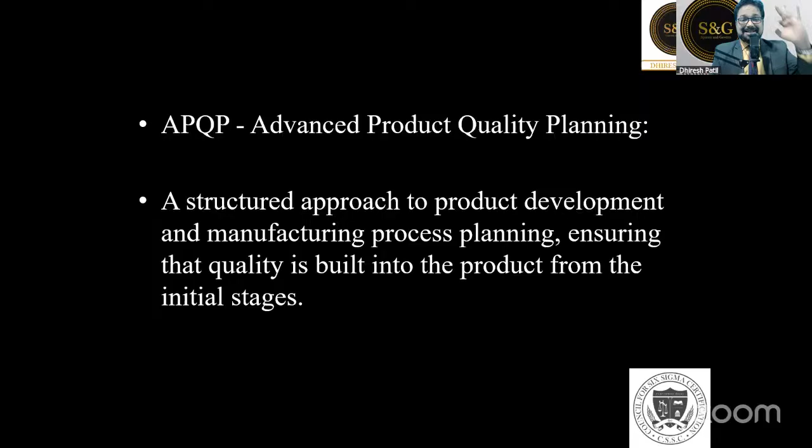Because most of the times, whenever we observe quality challenges, those are basically ingrained in the DNA or the design of the product itself, or the process which converts the raw material into finished goods. So either the design of the product or the process which makes that product; the root causes of those quality challenges lie in that. That's why advanced product quality planning ensures the quality of the product right from the initial stages itself.

Then comes failure mode and effect analysis, a systematic method of identifying and assessing potential failure modes and their impact on product performance, safety, and reliability. This is what we are going to go deeper into in today's session. So FMEA is: in this process, what are the various risks associated? Failure mode meaning the way in which the product can fail. Those various types of failure modes we can identify and take action about. We can assess the effect as well. We give specific rankings for severity, occurrence, and detection.

So FMEA is basically a risk analysis tool which analyzes the risk in the process and product, so that we analyze it beforehand and take measures to counter that. Then comes measurement system analysis, as I mentioned, GRR, gauge R&R, and AAA. For the very new people, when you go through the green belt curriculum, in the measure phase itself you will find measurement system analysis, gauge R&R, and AAA.

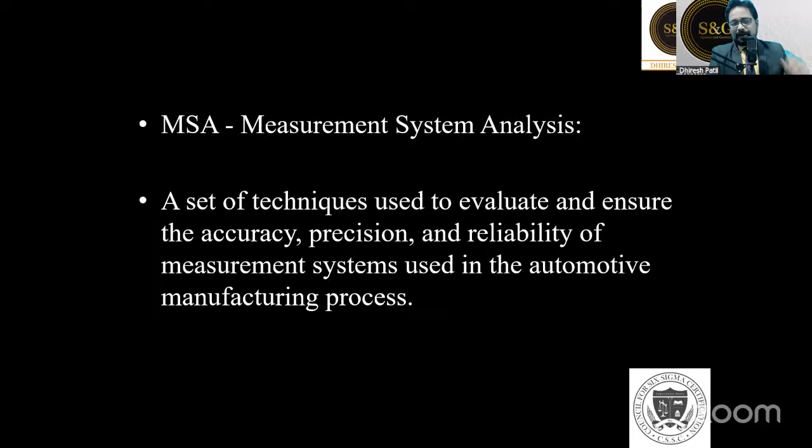So basically, measurement system analysis is a technique to evaluate and ensure the accuracy, precision, and reliability of the measurement system. In short, there is some variation induced by the measurement system, and to measure that variation we have the techniques of GRR and AAA. It started in the automotive sector, but it is also used in manufacturing and the service sector.

Then comes statistical process control. As I mentioned, quality control, the control charts, etc. The methodology involves monitoring and controlling processes through statistical techniques, ensuring they operate within the control limits. If you remember the control chart, upper and lower control limits, if the process flows within the control limits, that is a stable process. So statistical process control ensures that the process remains stable and within control.

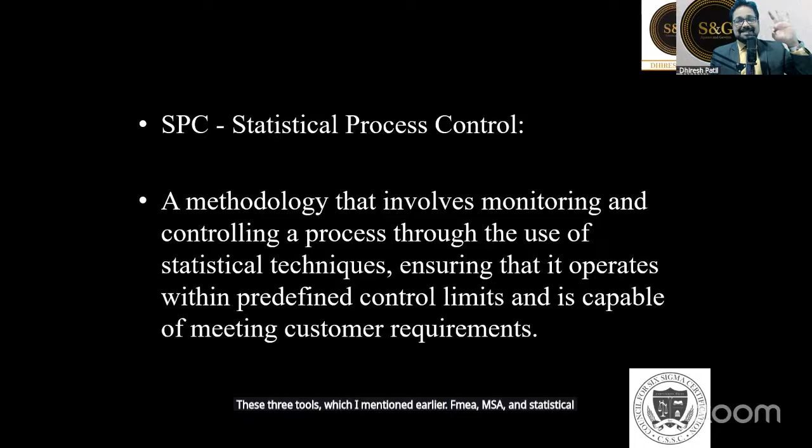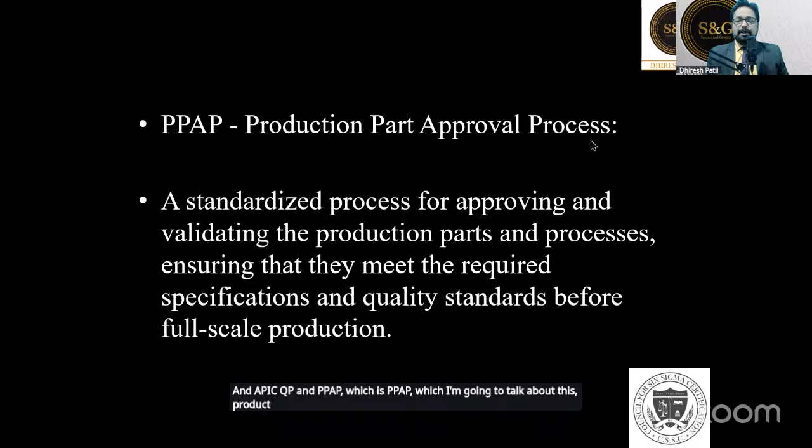So this is how SPC basically phases out. So see, these three tools which I mentioned earlier, FMEA, MSA, and statistical process control, are already there in the green belt and the black belt levels. And APQP and PPAP, production part approval process, which I'm going to talk about, are briefly covered in the master black belt curriculum.

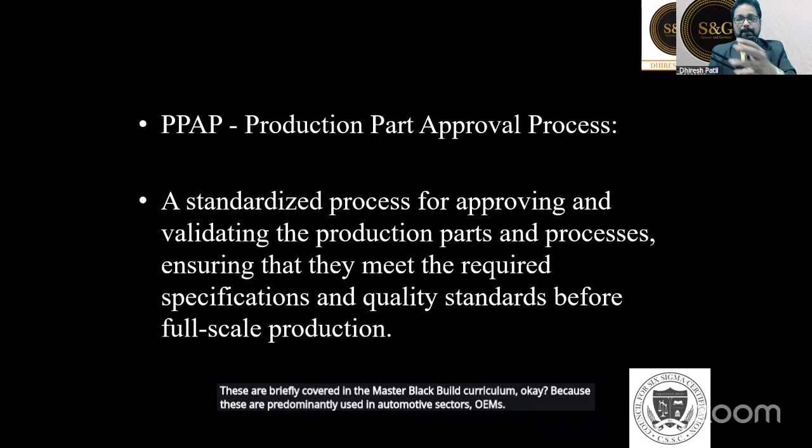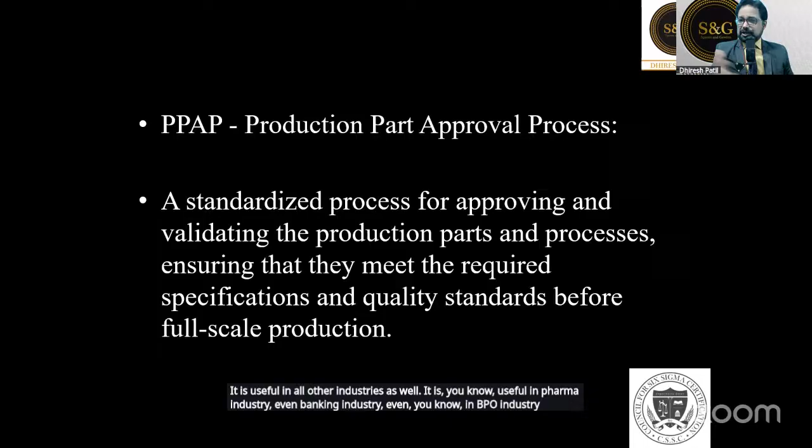Because these are predominantly used in automotive sectors, OEMs, original equipment manufacturers, and their tier 1, tier 2 suppliers. But even though it originated and is very strongly practiced in the automotive sector, it is still useful in all other industries as well. It is useful in the pharma industry, banking industry, even BPO, manufacturing, any industry you can take. These processes are very, very powerful.

So the last one is PPAP, which is production part approval process. It's a standardized process of approving and validating the production parts and processes, ensuring that they meet the required specification. So it's like you take a small scale pilot run, and then you make sure that all the parts and all the processes were followed properly, all the settings were done properly, and the product is matching the specification set by the customer. Once that is approved, then only you can go for full scale production. So this is called PPAP.

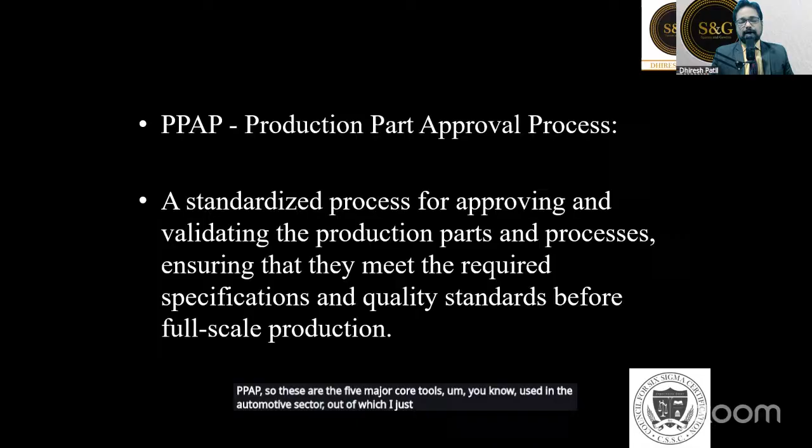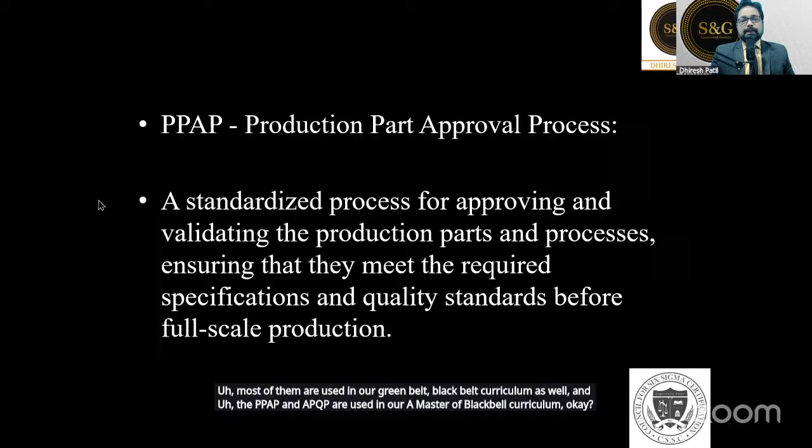So these are the 5 major core tools used in the automotive sector, which I just bifurcated. Most of them are used in our green belt, black belt curriculum as well, and PPAP and APQP are used in our master black belt curriculum. Now let's talk about FMEA. FMEA is, as I mentioned to you, failure modes and effects analysis.

This originated in the 1940s in the US military, specifically in the aerospace and defense industry. After that, it was further refined and expanded in the 50s and 60s, and they started using it in NASA and the automotive industry. Now understand this, NASA and the automotive industry are industries where precision is very important. Accuracy and precision are very critical, because if anything happens to NASA satellites or a rocket or whatever project, it runs into billions.

Even in the automotive industry, if anything goes wrong, it directly impacts the life of the people traveling in that automobile, as well as the people on the road. Everybody will be at risk. So in these two areas, it is very important to identify the risk well before and take corrective measures. Then in the 70s, FMEA gained broader recognition as a risk assessment and prevention tool in various industries. The 70s was the era where it spread across industry, and the industry started liking this.

And then the Automotive Industry Action Group, AIAG, if you remember this. This body got established in 1982, and they published the first manual of FMEA, the AIAG FMEA manual, which became a reference guidance manual for all these things. And then it got revived again.

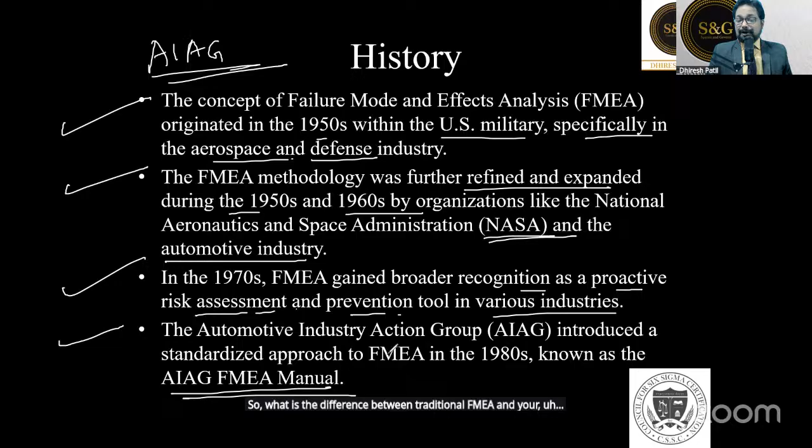But recently, see, the American automotive industry and the German automotive industry are different. In today's session, what I'm talking about is traditional FMEA. So what is the difference between traditional FMEA and modern FMEA? Let me touch upon it and give a quick bifurcation. There is one part which is US based companies, and that body is called AIAG, Automotive Industry Action Group.

The second body is a Germany based body. So US based is AIAG, and the German based is VDA. VDA is a German term, Verband der Automobilindustrie. You need not remember this, but just for your information, it is the full form of VDA, and Automotive Industry Action Group is the full form of AIAG. So these are the two bodies basically.

Now, AIAG is a relatively new body. The German body is a very old body, established in 1901 or 1902. Now if you see the big US brands which are members of AIAG, it is General Motors, Ford, all the US brands. Can you just name a few US brands for me? You have Chrysler, and you have what? Chevrolet, right?

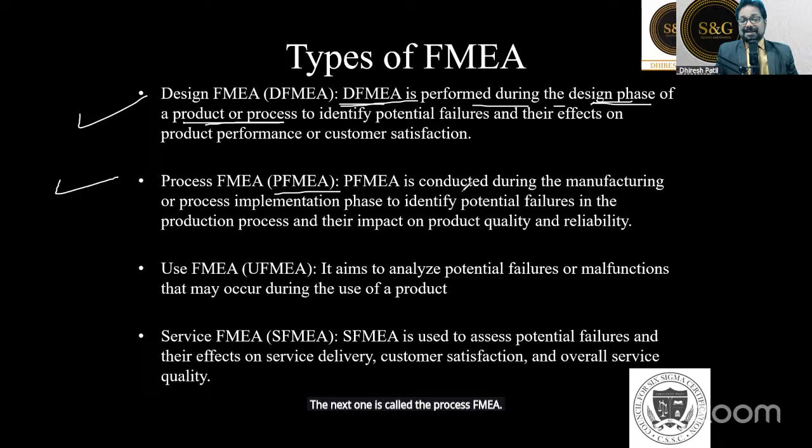So if you see, there are 4 types of FMEA. One is called design FMEA. Design FMEA, the name itself suggests, is performed during the design phase of the product or the process. In the design phase itself, what can go wrong? What are the risks associated with it? That is called design FMEA. The next one is called process FMEA. Process FMEA is conducted during the manufacturing process and implementation phase, while you are producing that part. So during production, what can go wrong? That is called process FMEA, PFMEA.

And in Lean Six Sigma, we majorly focus on PFMEA. Okay. But of course, we cover DFMEA and the other parts of FMEA as well. Then there is something called UFMEA. It aims to analyze the potential failures and malfunctioning during usage. Now understand this, okay? If you want to design a laptop, in the design stage itself you find out the risks associated with the design, the product, the processes. That is called design FMEA, during the design phase.

Then you start making the product, okay? In the manufacturing process, whatever risks are associated, if you start to capture those risks, that is called process FMEA. First is design, second is process. Now the product is ready. Now the customer has started using the laptop. Let's say, for example, I'm using the laptop. So during the usage, what can go wrong? That is called UFMEA or use FMEA. During the use of the product, whatever risk is associated, that is called UFMEA.

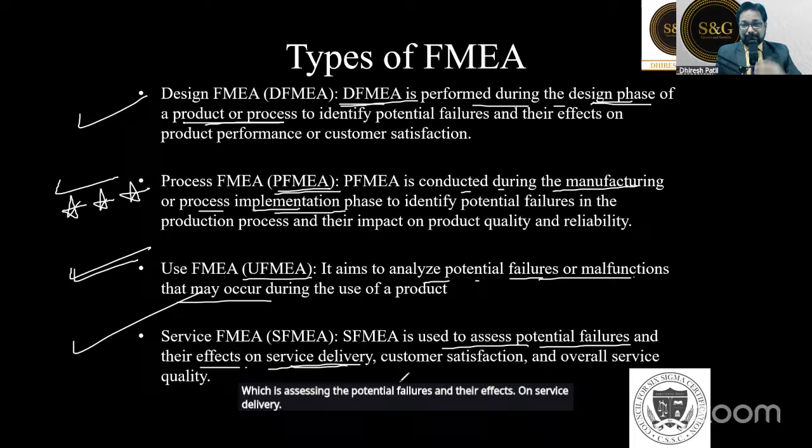And there is the final one, which is called SFMEA, service FMEA, which is assessing the potential failures and their effects on service delivery. Okay, if you are providing a service, not a product. For example, let's say training. Training is a service, right? So in training, what kinds of failures can happen while delivering that service? Consultation is a service. So while delivering the consultation service, what kinds of

Somebody got unmuted. Make sure that you're muted all the time.

Now, service FMEA: if you're delivering a service, what can go wrong during the service? What can impact the customer satisfaction and overall service quality? Those potential failures are captured in service FMEA. Majorly our focus relies on the process FMEA, because as we all say, Lean Six Sigma is applicable wherever there is a process in place. So we identify process failure modes and process risk by using process FMEA.

Are you clear with this? Anyway, I'm going to give this entire presentation to you. Are you clear? Just give me yes in the chat box.

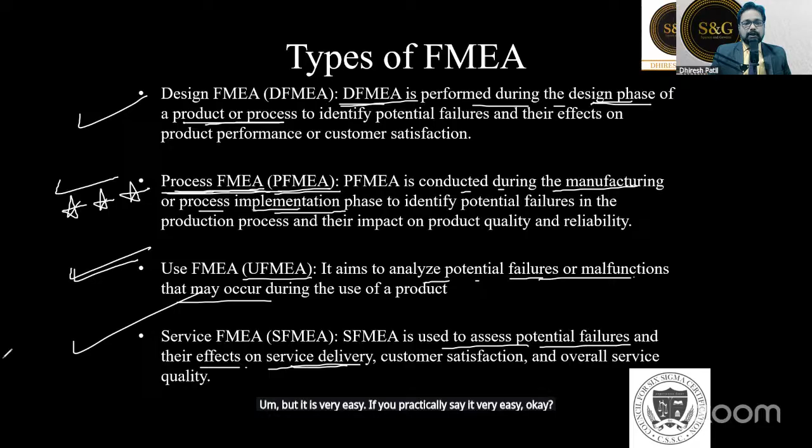Four types of FMEAs, and we are going to focus upon process FMEA the most. I'll give you a couple of examples so that you can easily understand it. Initially, it might look a little tricky to understand the nomenclature, but if you practically see it, it's very easy. Now, let's break down this failure mode, effect, and analysis, and the associated vocabulary.

The first word here is failure. What is failure? Failure means simply a component or a system not meeting the functional intent. For example, the lighting system does not provide the intended illumination. Why do we put the light? Because we want the intended illumination, that much brightness. If that brightness is not there, then it is a failure. Sometimes it will not even start. That is also failure. So whatever is the intention of that product or service, if that is not fulfilled, that is called failure.

Are you clear with this? Just type yes in the chat box. This is very, very important. Are you clear? Just type yes in the chat box.

Failure is if your product fails to meet the specification requirement or intent of use. Very simple explanation, simple example. Let's go ahead and understand the failure mode. Failure is failure to meet the intention. What is failure mode then? Failure mode is the manner in which the component or the system fails.

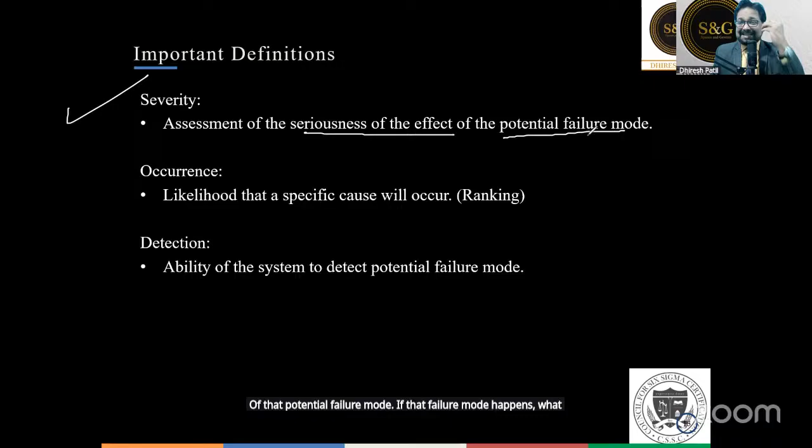So what is severity? Severity is nothing but the seriousness of impact. If that failure mode happens, what will be the seriousness of its effect on the customer? That is called severity, and we have to give the ranking on the scale of 1 to 10.

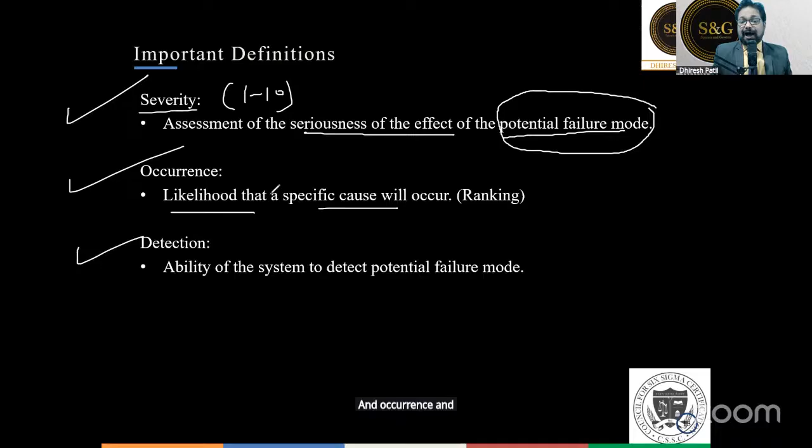Then occurrence: how likely that specific cause will happen. I'll show you a table that will give you more clarity. Severity rating is given to the failure mode, and occurrence and detection are given to the causes. Understand this? Occurrence is how frequently it is happening. And detection: if that cause actually impacts, how are we equipped to capture that impact? That is called detection.

So occurrence means how likely it will happen, the frequency. If it is happening very frequently, every day 10 times, 100 times, on the scale of 1 to 10 that is 9 or 10. But we are not giving the number of times. If it happens 50 times every day, I will give the ranking 8, 9 or 10 because it is very frequent. But if it is happening once in 6 months, I will give ranking 1, 2 or 3.

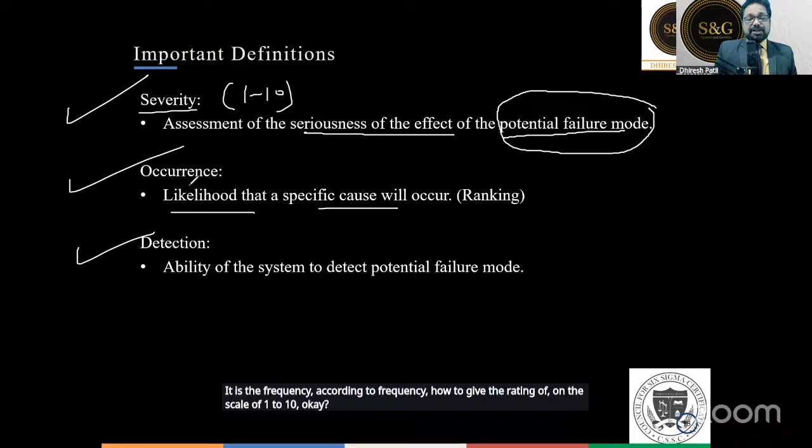How that ranking is given, there is a standard in the manual, and I'll show you that standard as well. So occurrence means how frequently it is occurring. It is not the number of occurrences; it is a ranking on the scale of 1 to 10. A lot of people see it happened 5 times, so they give 5. No, according to frequency you have to give the rating on the scale of 1 to 10. And then detection. Detection means, for example, imagine there is no AIAG ranking table.

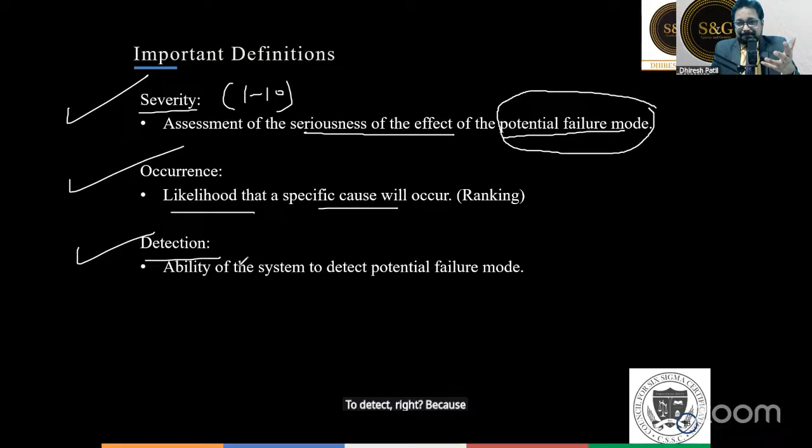Okay. Now, imagine detection, meaning there is some production going on, but there is no quality check. So there is no detection system. It directly goes to the customer. So there is no detection system at all. Wherever the detection is not there, the defect is very difficult to detect, right? Because there is no checking happening. So it is very difficult to detect, so I will rank it as 10.

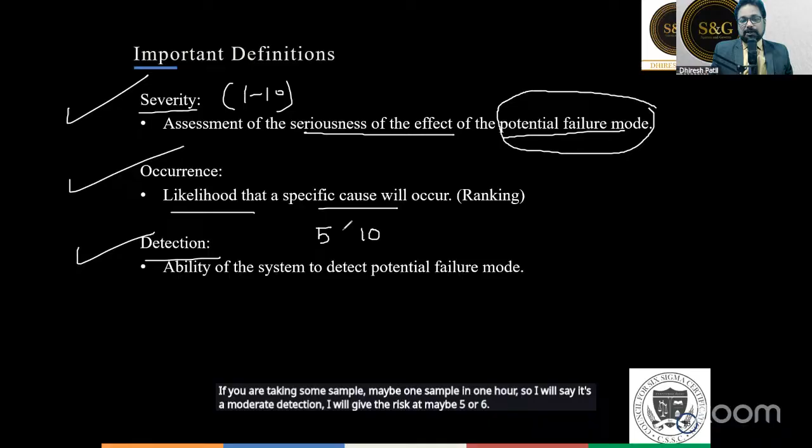If you are taking some sample, maybe one sample in 1 hour, I will say it's a moderate detection. I will give the risk maybe 5 or 6. But if you have a very strong detection system, every product is checked very thoroughly, completely, so the detection risk is very, very low. So I will give even 1 or 2.

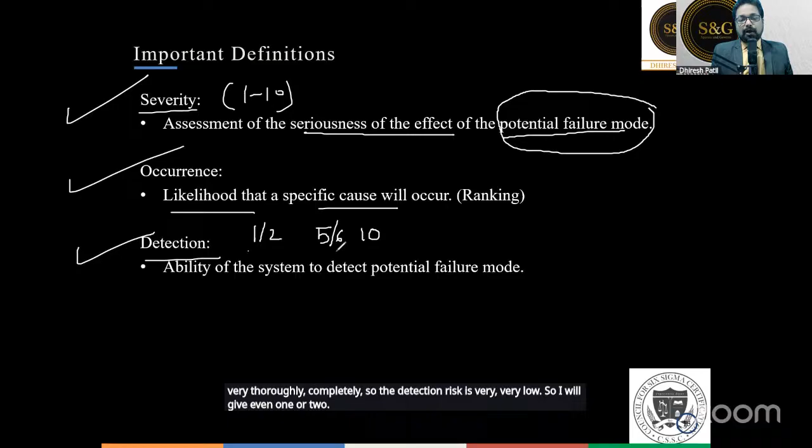Are you understanding? So detection meaning what? If your system is very strong in detection, your risk is reducing. Strong detection system, low risk, so I will give 1 or 2. Moderate detection system, moderate risk, I will give 5 or 6. Very limited or no detection system, the risk is very high, so I will give the difficulty of detection as 10.

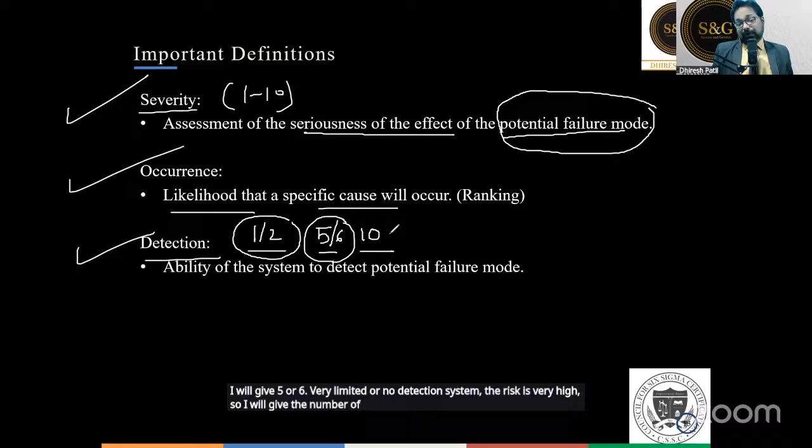Are you clear? Yes, current control. Exactly. The detection is the current control. What current control mechanism we have? Let's say in my society there is no watchman, no CCTV camera. What will be the ranking for the risk right now? Type in the chat box. What will be the risk on the scale of 1 to 10? Yes, 9 to 10. Are you clear?

Very simple. And if we have very high-tech security cameras and 2 watchmen at every door with guns, etc., the detection of any security threat is very, very good. So the risk is very low, and on the scale of 1 to 10 I'll give 1, because the risk of somebody intruding is very low since we have a very strong security system established. Exactly how equipped the system is. So these are the rankings we give in the FMEA table. I'll show you a couple of practical cases so that you will understand this.

So once we give the ranking like this, then we identify the risk priority number, which is called RPN, which is the multiplication of severity number, occurrence number, and detection number. Severity, occurrence, and detection, we multiply this, that becomes RPN. That defines how much risk is associated with that failure mode and the cause, and what is our priority. Are you clear?

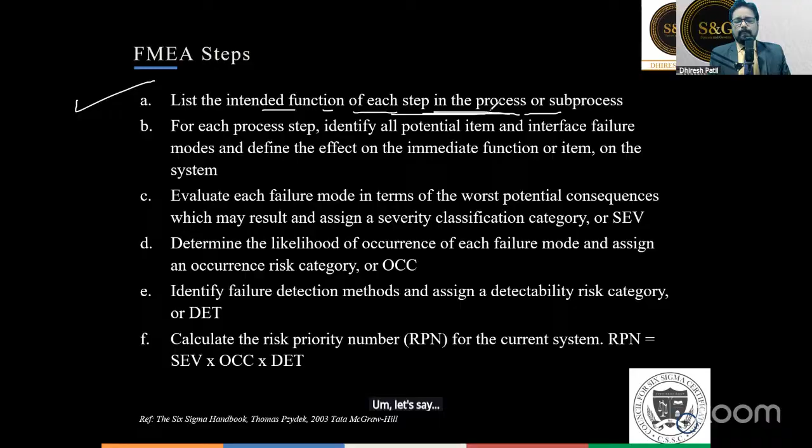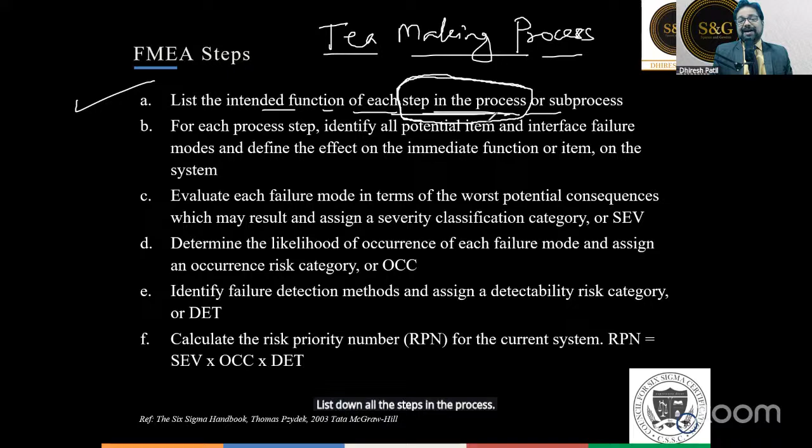So what are the steps to conduct FMEA? First of all, list the intended function and steps of the process. Let's say there is a tea making process. The first step is list down all the steps in the process. In define phase, we have one tool where all the steps are properly mapped. What is the name of the tool? Can you just type in the chat box?

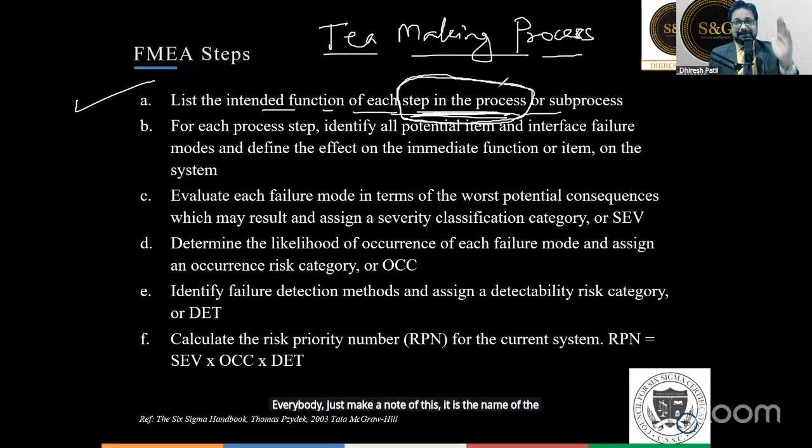Flowchart, close, but it's not flowchart. CTQ tree, no. Yes, it's SIPOC: supplier, input, process, output, and customer. In that, P stands for process, where we have all the process steps listed. Everybody just make a note of this. The center column is called process, so we have all the processes listed there. That's the first step.

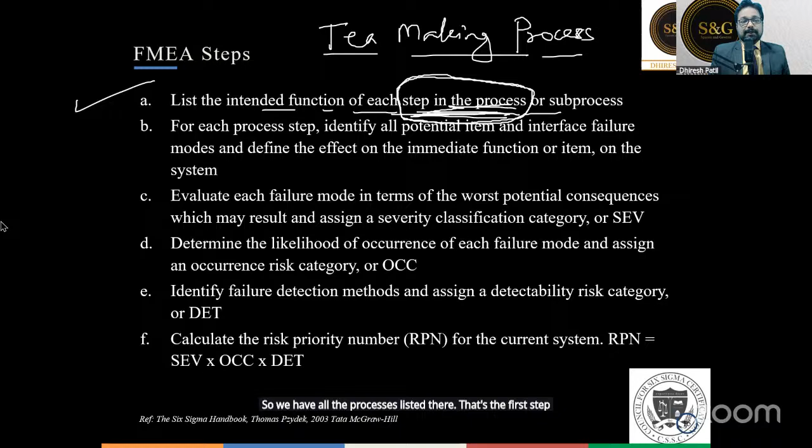Then the second step is, for each and every step, identify all the potential item and interface failure modes. For example, the first step of making a cup of tea is boil the water. Now, in boiling the water, what are the potential failure modes? How can boiling the water fail? For example, let's say you don't have the gas that day.

So, or the gas is there, but the intensity of the gas is very low, a very low flame. So it is not boiling properly. Or you don't have the lighter basically to start, which can delay the boiling process. All right. Or maybe the water which is used may not be proper, there might be some more ppm, so it might impact the boiling. I'm just guessing some more. So the way in which that process will fail, that is called failure mode.

So in process step number 1, let's say I want to walk across the road. What are the ways in which I can fail to reach the other end? I can trip, I can fall down, I can slip because of a banana peel, I can slip because of an oil spillage on the road. There are multiple ways in which I can fail to reach the destination. So these are various failure modes. Similarly, first you list down the steps, then what are the failure modes in that?

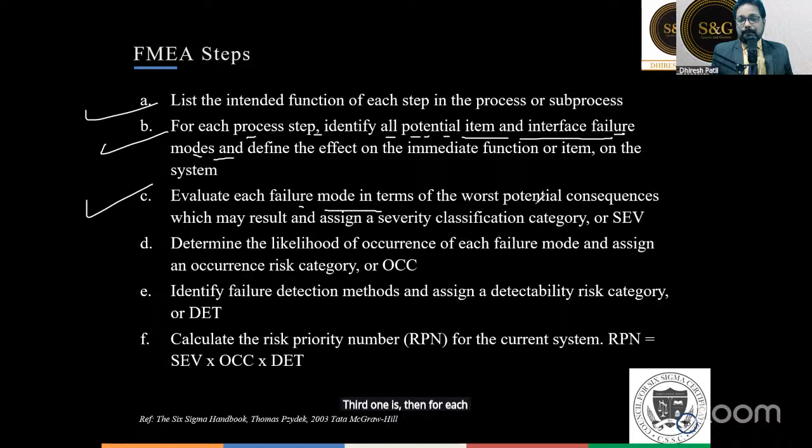Third one is, for each failure mode, what are the potential consequences? That is called severity. Identify what is the effect, what is the consequence which will impact. For example, while walking, if I slip on the banana peel, I can fall back on my head. So what worst potential consequences can happen? You can give that impact, and give the ranking of the severity on the scale of 1 to 10.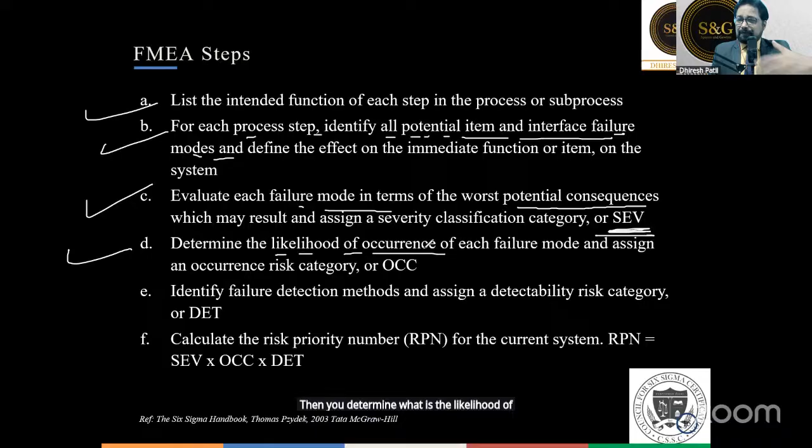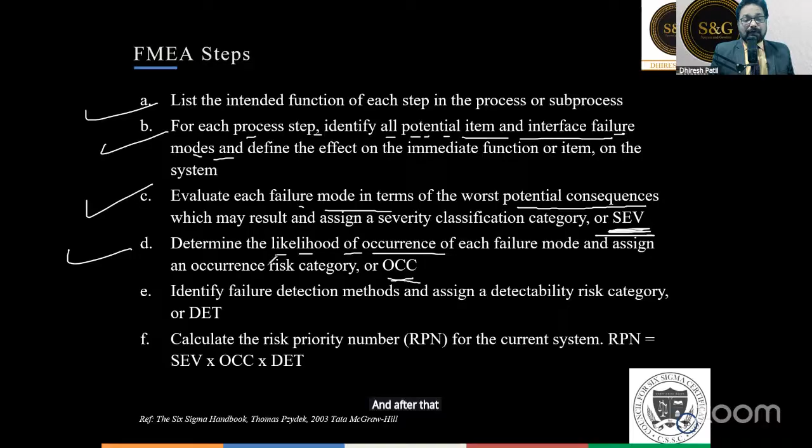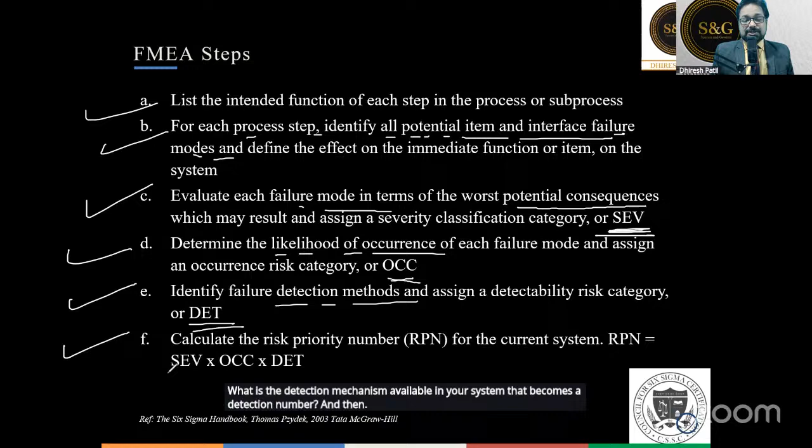Then you determine what is the likelihood of occurrence, how frequently that can happen. That can be given the occurrence rating on the scale of 1 to 10. After that, identify the failure detection method. What is the detection mechanism available in your system? That becomes a detection number. Then you multiply severity, occurrence, and detection to find out the RPN, which is risk priority number. So these are the steps. First, list down the process steps. Second, for every step, what is the failure mode? For every failure mode, what is the severity, the likelihood of occurrence, and the detection.

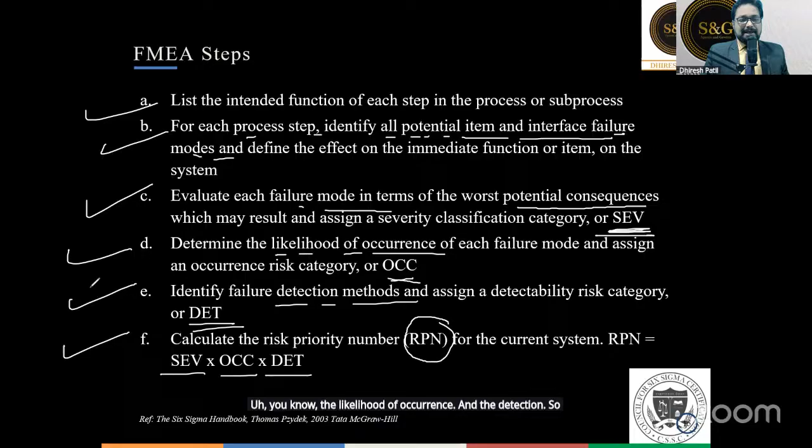So let me give you a practical example of this. Before that, after doing RPN, what happens is this. Determine the compensating provision for each failure mode. We don't only stop at the RPN number, but we identify what can be done to reduce that risk. Then identify the corrective actions, and the effect of the corrective action, what positive effect we can expect.

And then identify severity, occurrence, detectability risks. If we implement the corrective measures, what will be the new numbers of severity, occurrence, and detectability? So the after RPN also can be identified. The point is that from present RPN to after RPN the risk should be reduced. Then we summarize this document and hand it over to the process people so that they can follow this religiously. So this is how this entire process works.

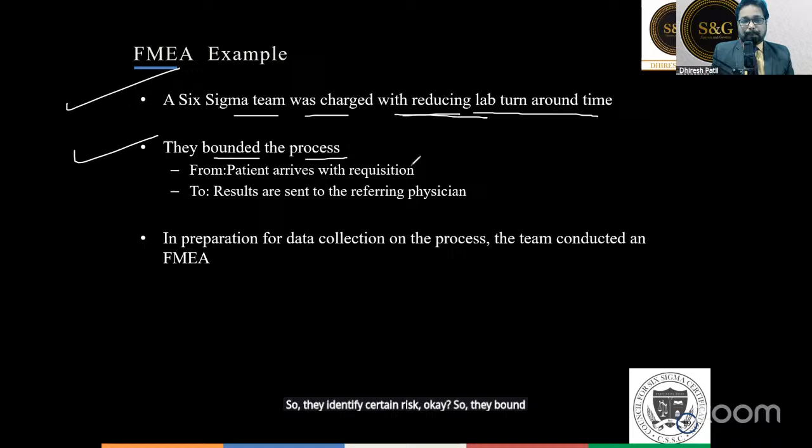So they identified certain risks and bounded this entire process. Patient arrives with the requisition, that is, the doctor's requisition is with the patient, and the results are sent to the referring physician. The first process and the last process, and whatever happens in between, is the scope of the project. In preparation for data collection on the process, the team conducted an FMEA. This is a very small, simple example.